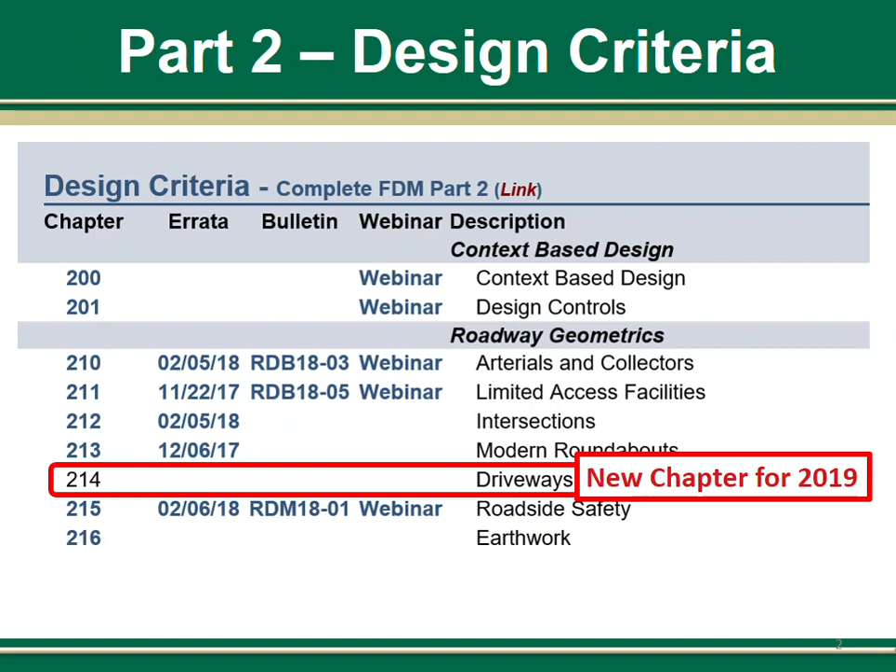As you may know, the FDM was a huge effort last year, and we didn't really have time to get to all of the chapters we wanted to develop for the FDM. And this was the case for chapter 214, but we were able to get it ready for the 2019 FDM. And we began by putting together a task team late last year. We ended up with a pretty diverse team from 4 different offices to develop and organize the new chapter. And our first meeting was at the end of January.

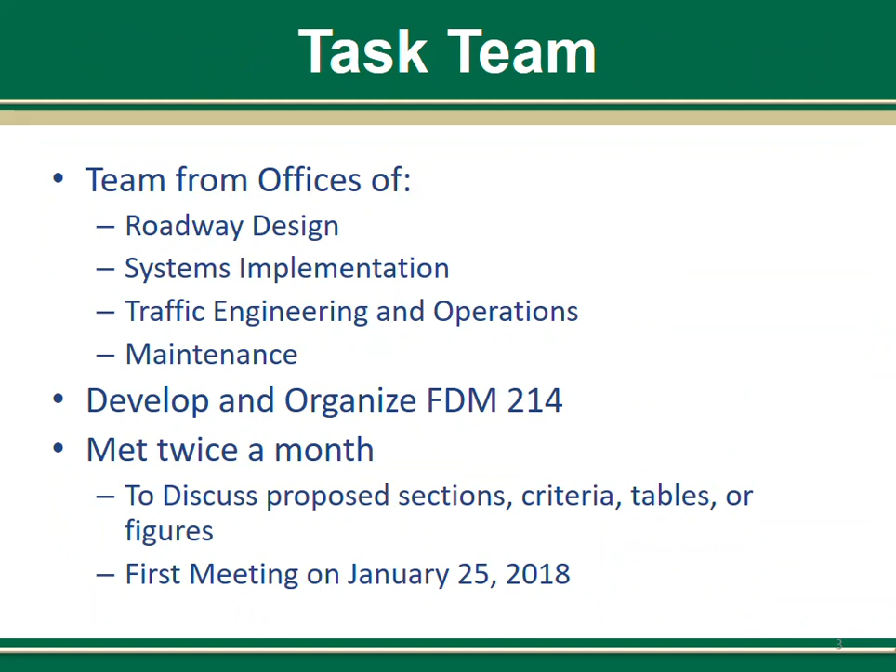Our team consisted of 8 original members. I was the lead on this task team, but there were two other members from the Roadway Design Office, including Mary Jane from Criteria and Durwood from Standard Plans. Gary and Gina represented the Systems Implementation Office, and Gary was one of the last authors of the FDOT Driveway Information Guide in Central Office. So we wanted to capture as much of his knowledge as we could before he retired in the spring.

We also had Alan from Traffic Engineering and Operations, Tim from Maintenance, and Jim, a consultant. Now Jim was kind of our historian with over 35 years of engineering experience with FDOT, and he worked in Central Office for many years and as a subcommittee member on the AASHTO Green Book.

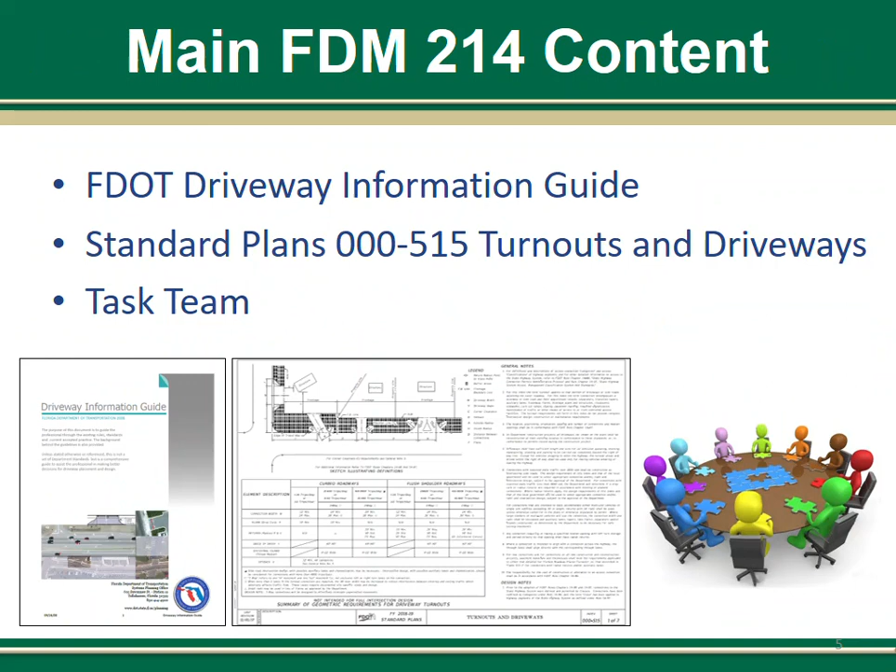We had 2 main sources for developing this chapter other than the task team, including the old Driveway Information Guide and the Standard Plans Index 515. We started with the Driveway Information Guide, which was about 94 pages in length, but you'll be happy to know that we ended up with a much smaller chapter for the FDM. It's about 24 pages long, and it took several meetings to decide what should be included in this chapter.

We considered 3 different options initially. One that was really an all-inclusive chapter that would cover everything you need to know for driveways from A to Z. And then the other extreme was to provide just criteria. We ended up somewhere in the middle, but closer to the criteria option, which provides mostly criteria with a little bit of guidance. And as part of our efforts to move design-related information from the standard plans to the FDM, the criteria and many of the figures and tables in this chapter came from the standard plans, the old Index 515.

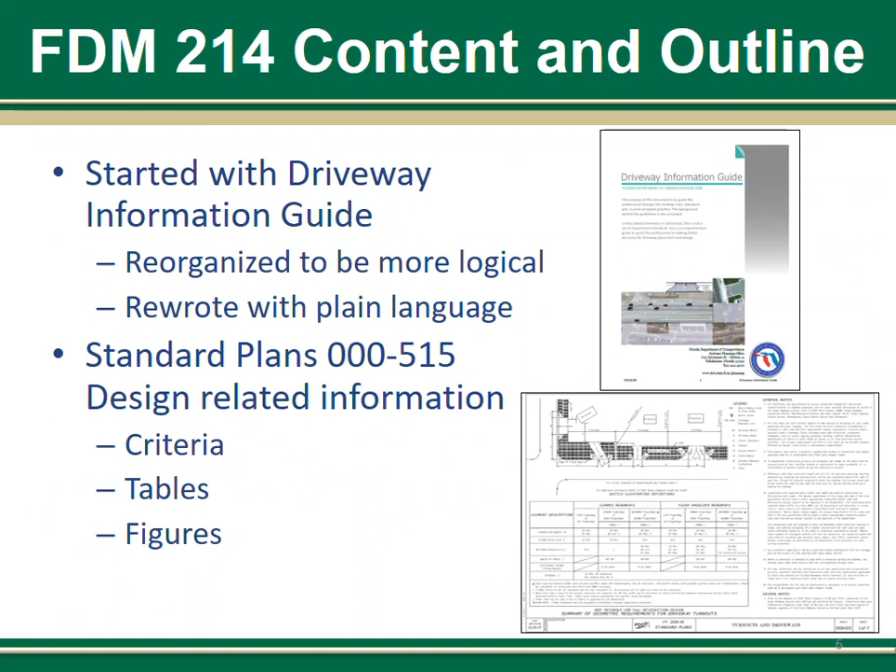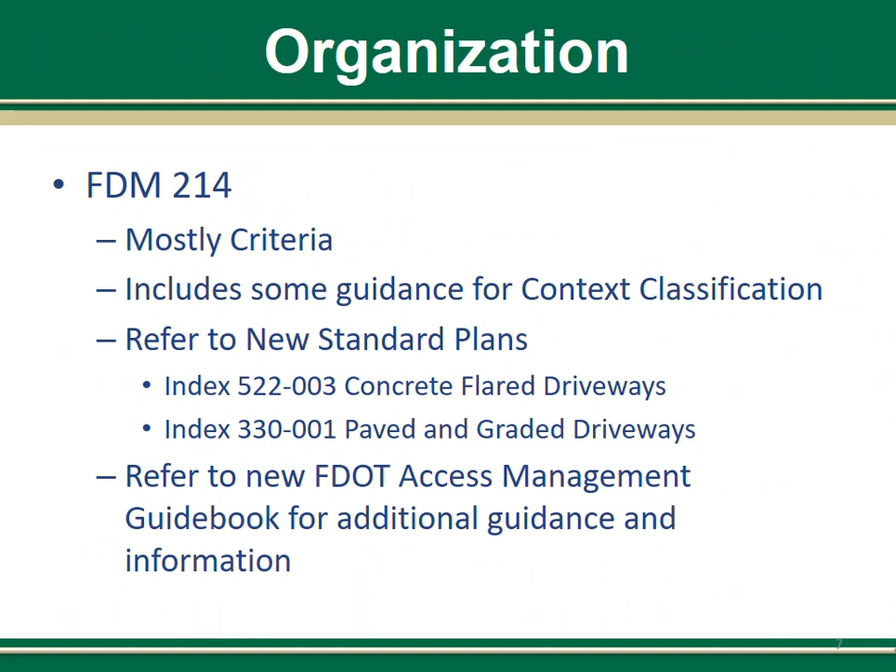So this chapter is mostly criteria with some guidance for context classifications, and it refers to the new standard plans and to the new FDOT Access Management Guidebook for additional guidance and information. Well, you might be wondering, what is this new FDOT Access Management Guidebook? Well, the new Access Management Guidebook combines and updates the old Driveway Information Guide and the Median Handbook. And this should be available in the near future, hopefully by the end of this year.

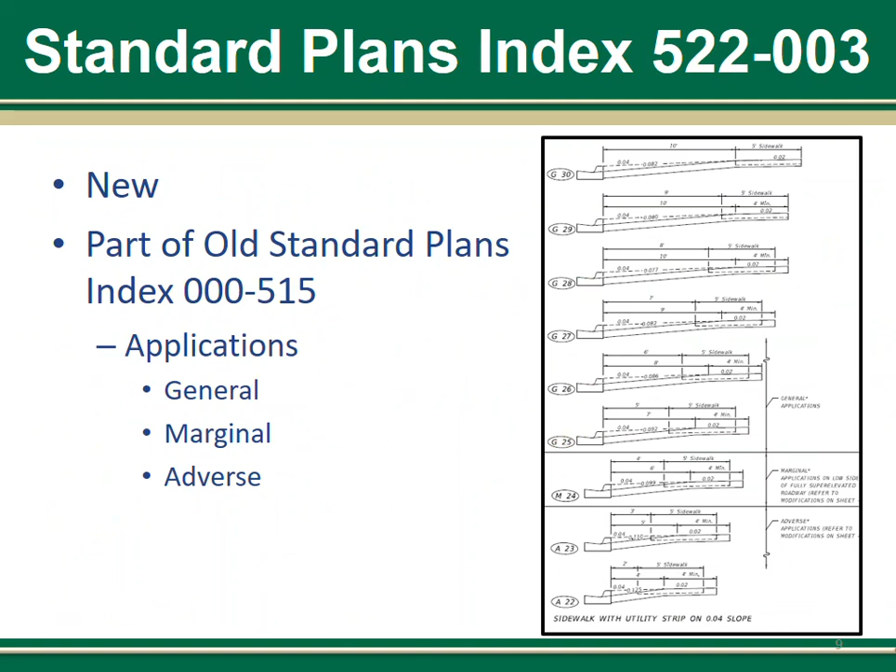The new Standard Plans Index 522-003 is part of the old Index 515, and it has the driveway application details from the old index, like the one shown here on the right of the screen. A description of each application from the general to adverse is now provided in the FDM in this new chapter.

So the chapter is divided up into 8 main sections. The first one, the general section, covers what is contained in the chapter, and it defines the term driveway and related terms such as connection and turnout. And it includes two subsections for driveway terminology and evaluation of existing driveways. The flared and radial return design section gives designers direction on when each driveway type is appropriate. Whether you want to have a flared driveway or a radial return, it talks about when to choose which one.

And then we have two sections for driveway geometry, one for horizontal and one for vertical. In the horizontal section, most of the criteria, tables and figures came from the first sheet of the old Index 515. It also has subsections for each of the driveway elements covered in the table on the first sheet of the old index, which I'll get into in more detail in a few minutes. And then we had the vertical geometry section, which takes the last sheet of the old index, sheet 7, and brings those figures, tables, and notes over into this new chapter.

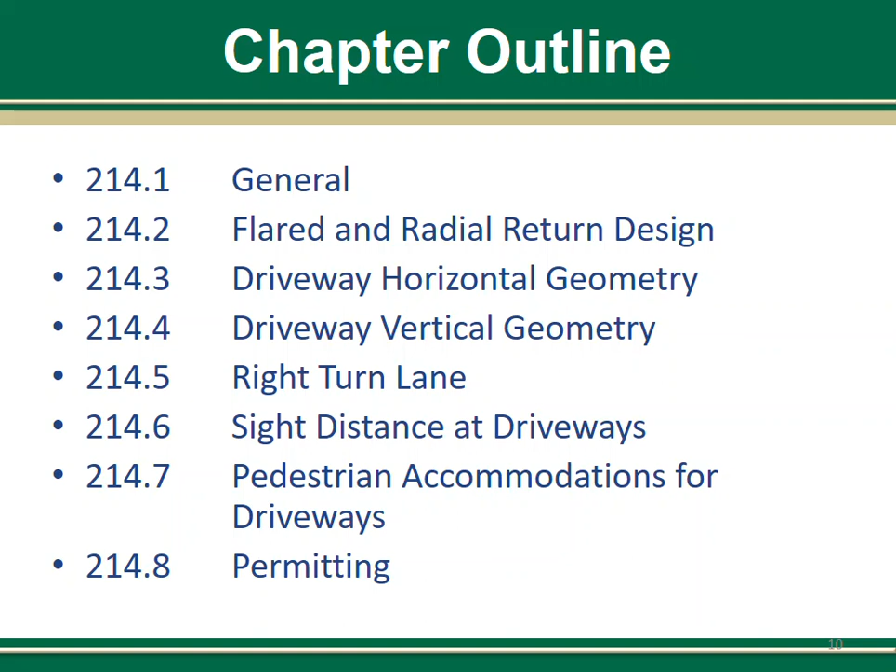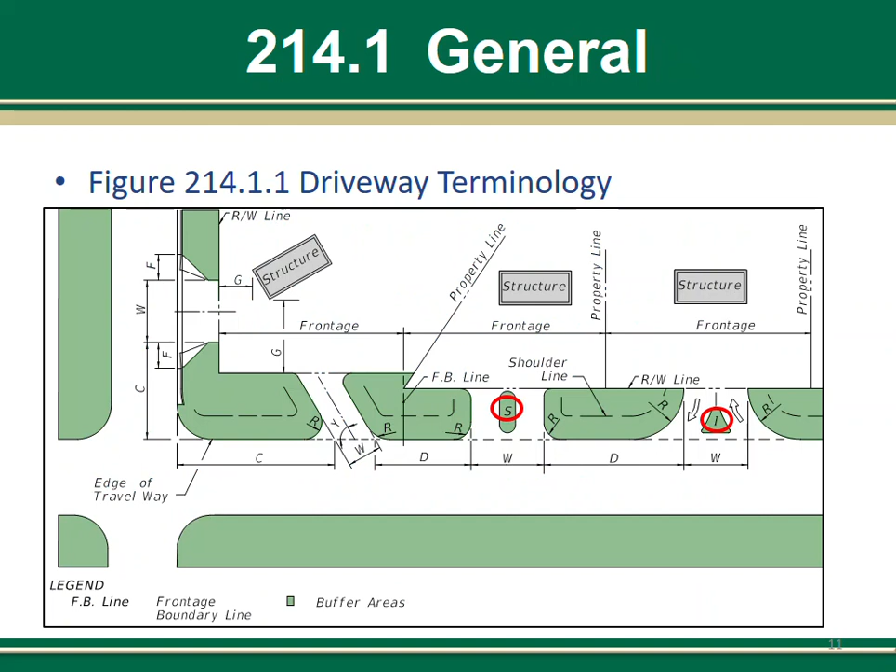Now this table was added here to help you determine when to use a flared driveway versus a radial return driveway. We broke it down into its simplest form, and the table consists of the elements of the roadway that you should be concerned about, whether it's a curbed roadway or a flush shoulder roadway. And then also you base your determination on the connection category.

So the connection categories, this is nothing new. It's from the old Florida Administrative Code, Rule 1496. Now, used to we had volumes. If you remember the old table from the index, it had volumes and the traffic volumes for each driveway, each connection. But these connection categories really include those types of volumes.

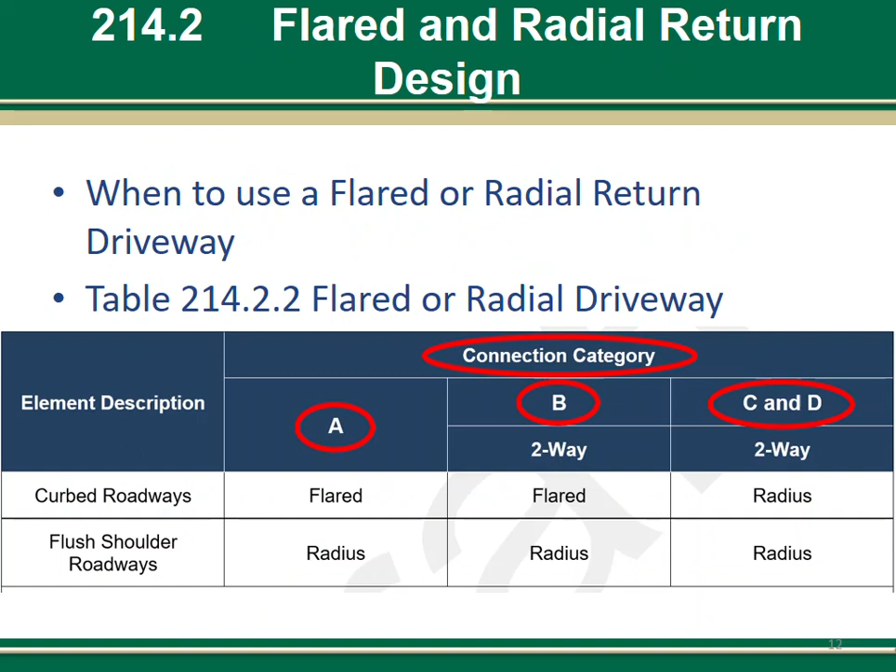So here is what is in the connection categories. This was from the old Florida Administrative Code. A through G are defined in that code. But for our purposes, for this chapter, we're only concerned about A through D. Anything above that, the higher volumes of driveways, would be considered not a driveway, but designed as an intersection, which are covered in FDM 212. But A through D, that's what we're concerned about with this chapter.

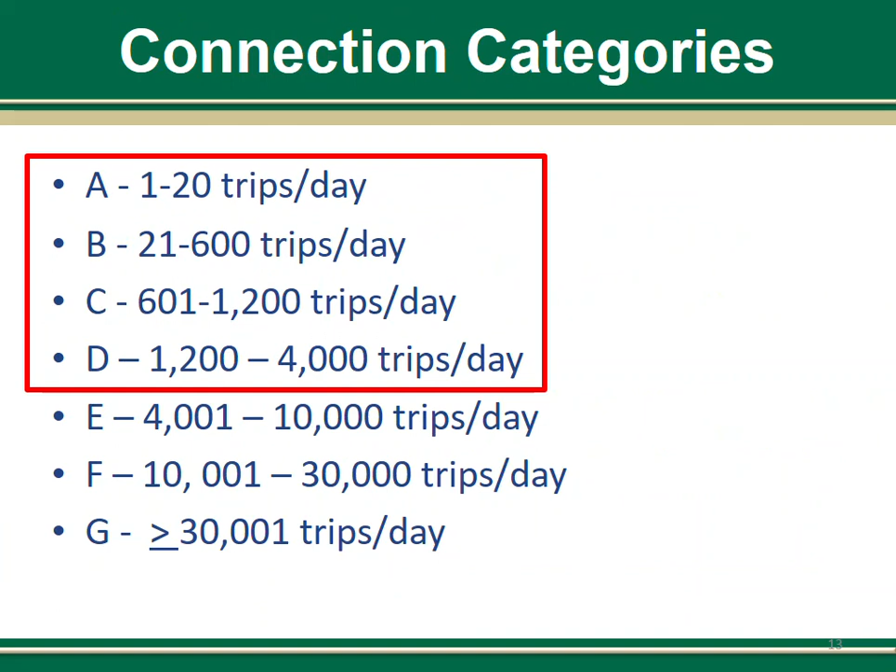This table is from the old 515 index, and it's been rearranged and updated to fit onto this page and be more consistent with the other FDM tables. But it's mostly the same as the old table that we had in the index. We did add a new row to the bottom there for corner clearance and driveway spacing with a reference to the tables in FDM 201.

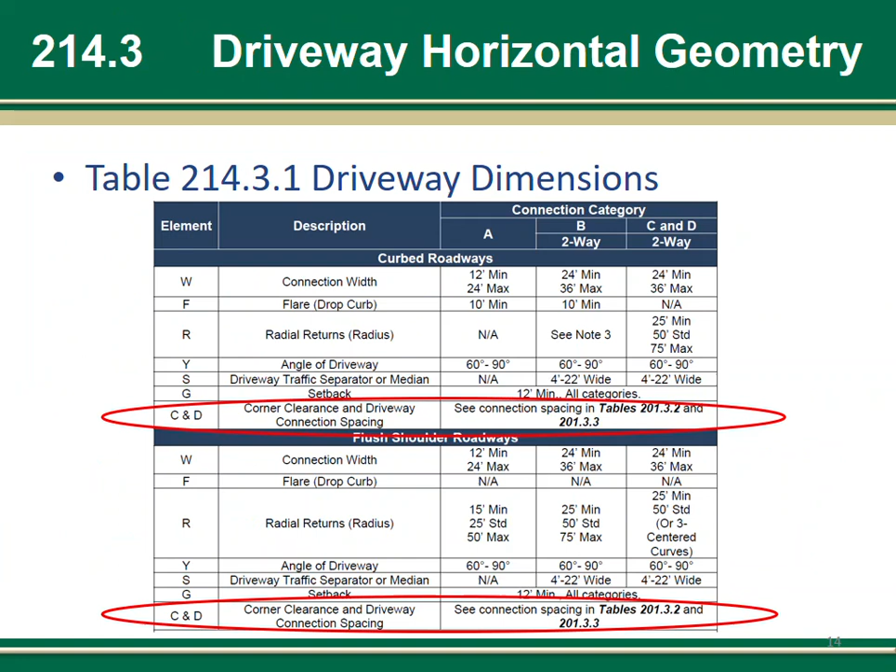We also replaced divisional islands and driveway with driveway traffic separators and medians, and replaced the slash with an NA for connection category A.

We replaced the diagonal line that was in the old table with a range of 60 to 90 degrees for angled driveways on connection category A. But this angle may be reduced if you need to, if you find it appropriate for your application, but it has to be approved by the local operations and maintenance office to do so.

And you might find the need to reduce this angle when you have a driveway that is for entry off of the roadway that can have a steeper, sharper angle there, less than 60 degrees. It's more of an issue when you're trying to get onto the main roadway, where you'd want to be closer to a 90-degree angle so that the driver can see down the road. It becomes more of a sight distance issue. But when they're getting off of the road, you can have a sharper angle there typically, and it's less of an issue. But we have a way to do that covered in Note 4.

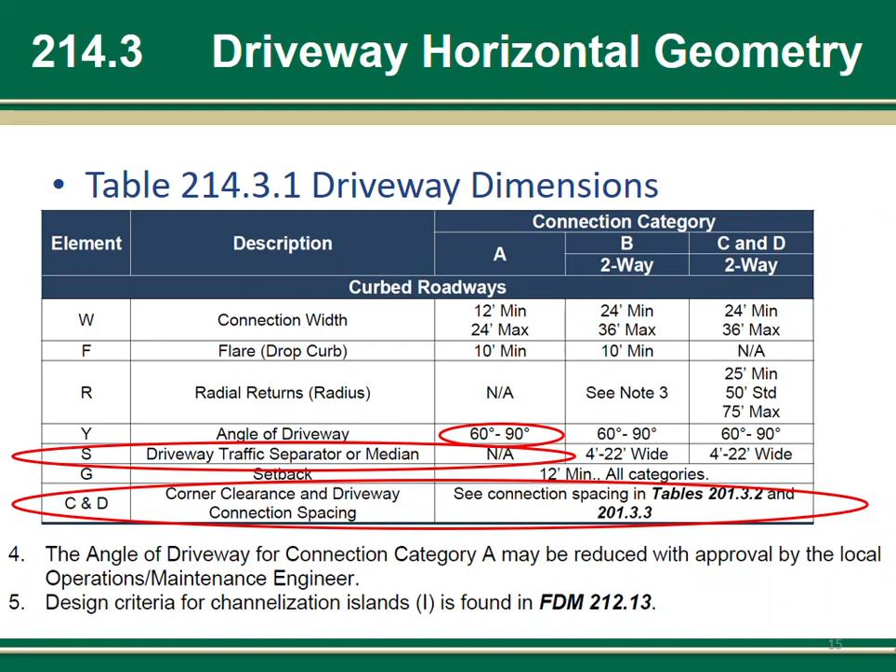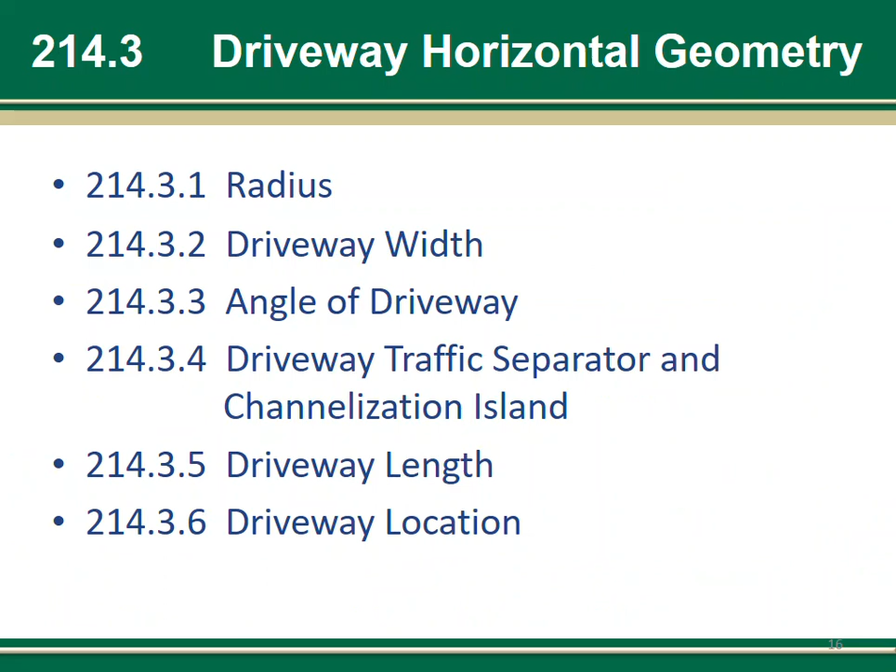So the driveway horizontal geometry section is broken up into six main sections, and these are all the elements that are from the table we discussed earlier. All these come from the elements in that table, from radius all the way down to driveway location. And these sections just go into further detail than the table did before.

Something new that we did add, we have two subsections for driveway location. The interchange areas, first one. Now this is not new. This is from the Florida Administrative Code 1497, and it was added. It's also been added to FDM Table 201.3.2, and it just wasn't provided in the old FDM, but it was referred to. You could go and find this information in the Florida Administrative Code, but we thought it would be easier just to bring it over so that the guidance, the criteria would be right here in this chapter, so you wouldn't have to go and look for it.

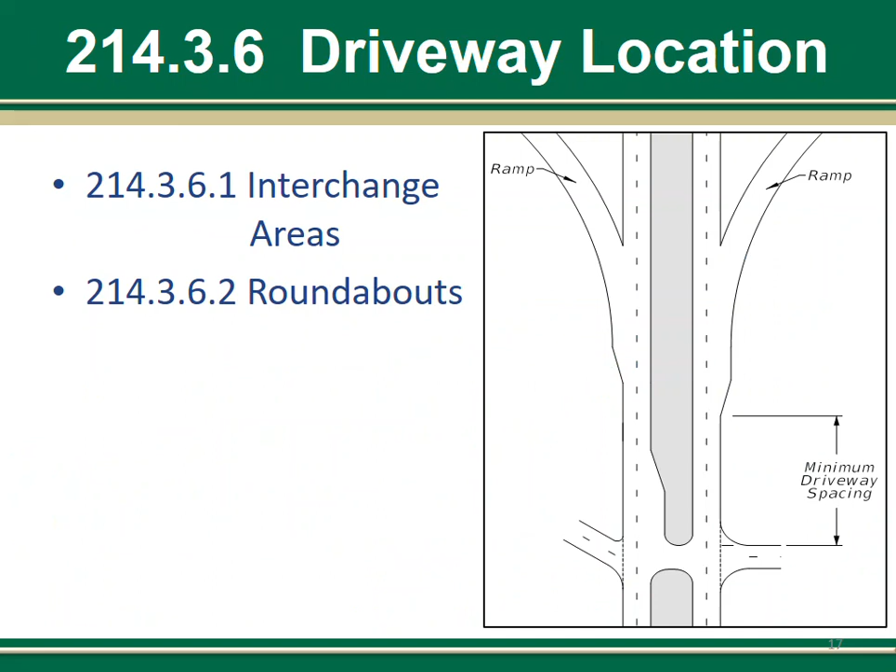And then the roundabout section, this is brand new to the manual, and it really was, we thought we needed to add something here for roundabouts, for driveways at roundabouts, because we're putting a lot more roundabouts on our roadways now. And this gives you some guidance and direction on how to do that.

For the driveway vertical geometry section, it's broken down into two main subsections: the driveway profile on curbed roadways, and driveway profiles on flush shoulder roadways. We'll go through these tables real quick, but most of them should look familiar to you.

Most of the figures and tables are brought over from the old index. We did add a little bit to help explain some of the things that have been brought over and have been around for a while, but we thought it would be useful, especially for newer designers.

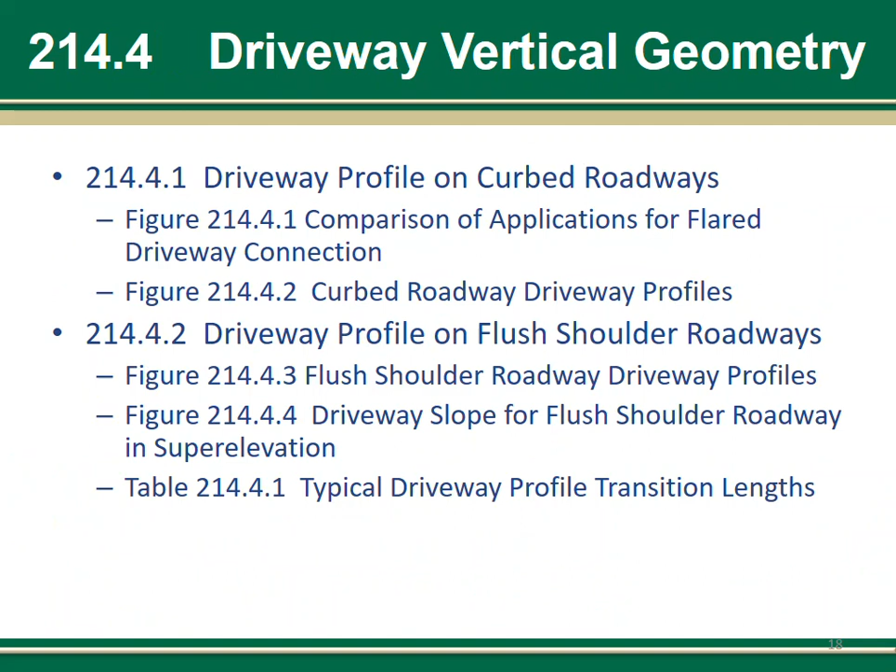So this figure is brand new. We came up with a figure that would just compare the different applications for flared driveways.

We still have the old details. All the details for these applications are provided in the standard plans, index 522003, about 2 pages worth of different figures and details, but we wanted to show you a comparison here.

So that you would quickly say, okay, I have plenty of right-of-way, so I can use a general driveway here. Or maybe I don't have as much room, so maybe I'll use a marginal or adverse driveway. The figure just shows you how they're different, how they vary a little bit, and you can pick out the one that's most appropriate from the index.

In this section, we also talk about what things to consider, what may happen, how it could affect some of your design vehicles using these different types of driveways, and how they vary. So there's a little bit more guidance here, to make it a little easier for younger designers to choose which driveway to use.

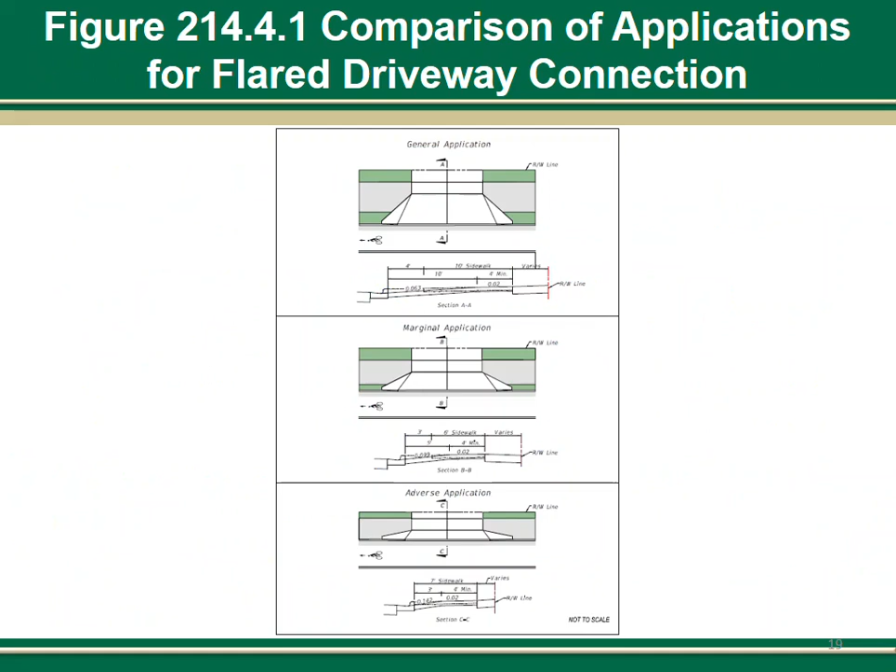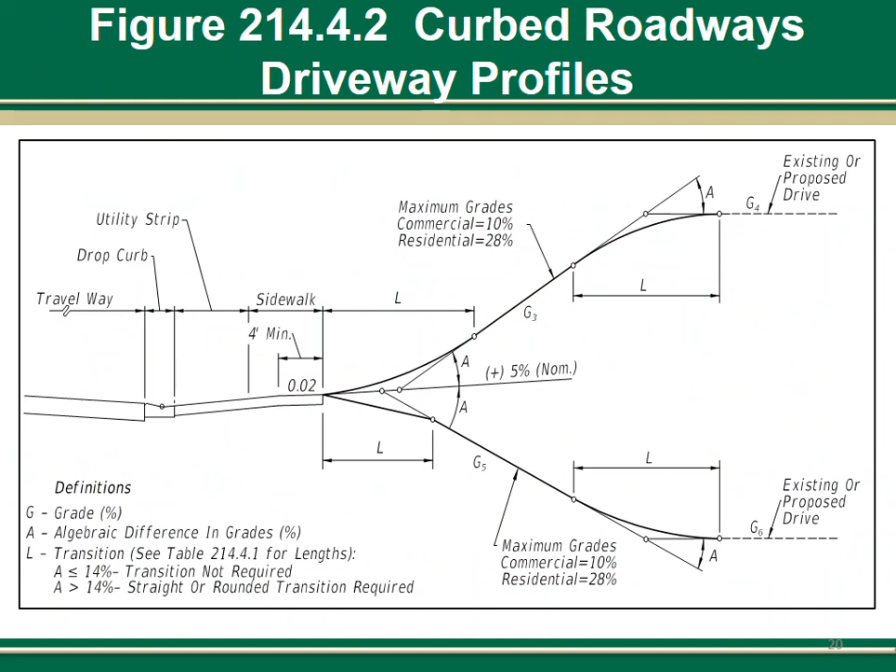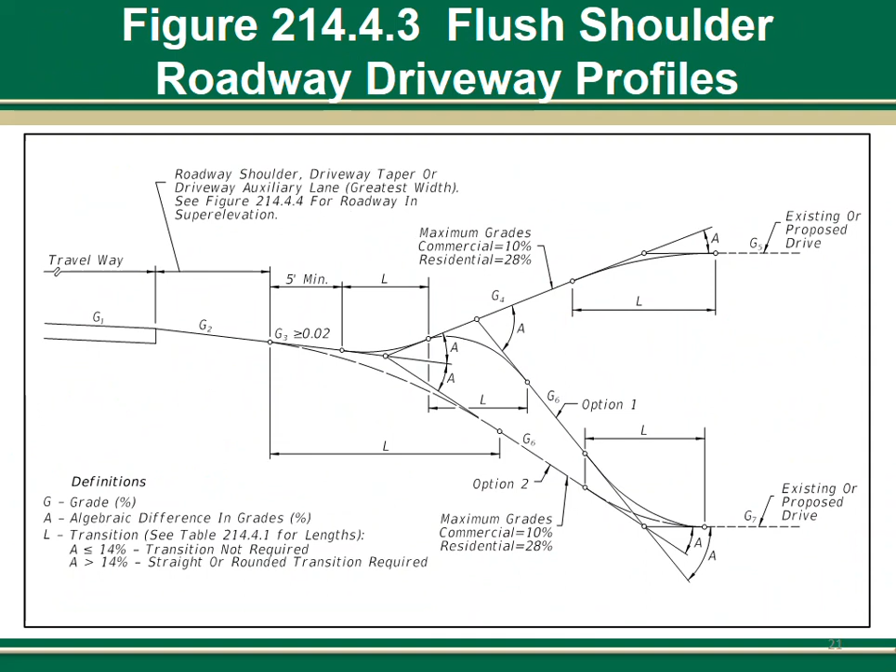This table also is pretty much the same. The flush shoulder roadway design driveway profile, we didn't change it. It's really the same. It refers to the table now that's been moved over to the FDM, but the criteria here is all the same.

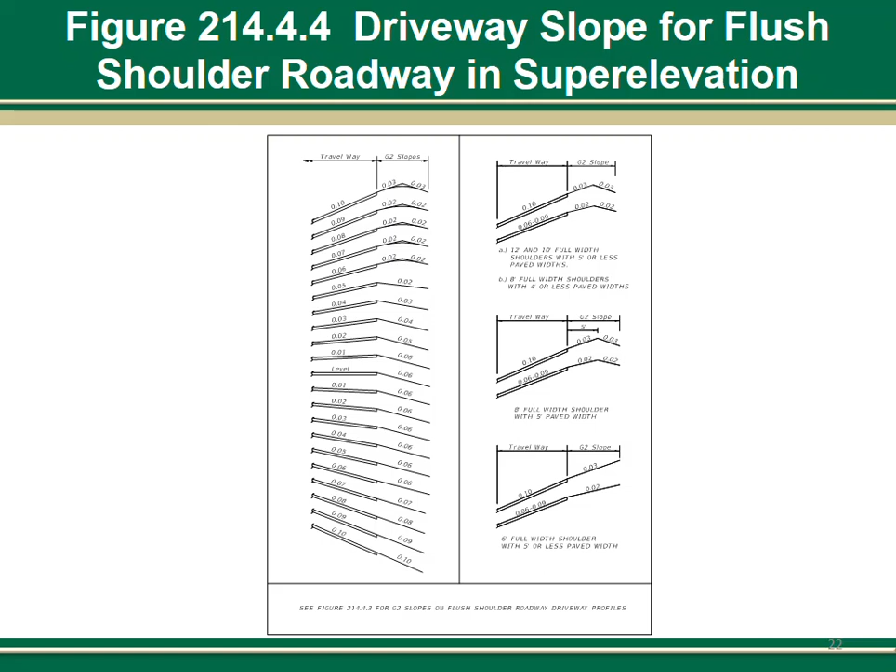This figure we didn't change anything here. We just cleaned it up for the FDM, but all these values are the same as they were in the old index.

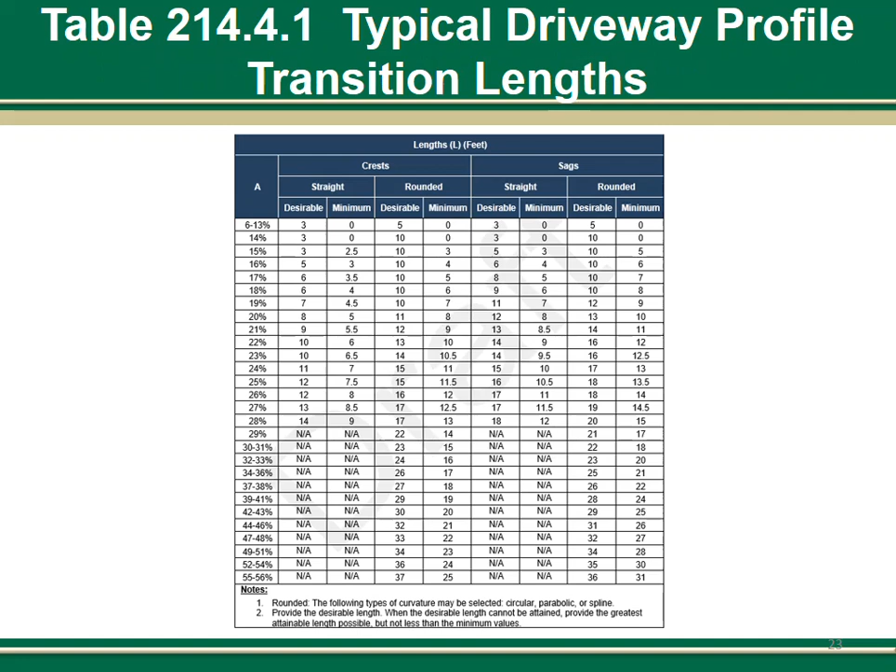So the last 4 main sections, most of these are just references to other parts of the FDM, other criteria that's already been around for a while. Nothing really new here.

The sight distance at driveways is something new I want to tell you about in just a second. But the permitting chapter I've already told you about. It talks a little bit about when you need permitting on your roadway, and then it links you to the one-stop permitting website.

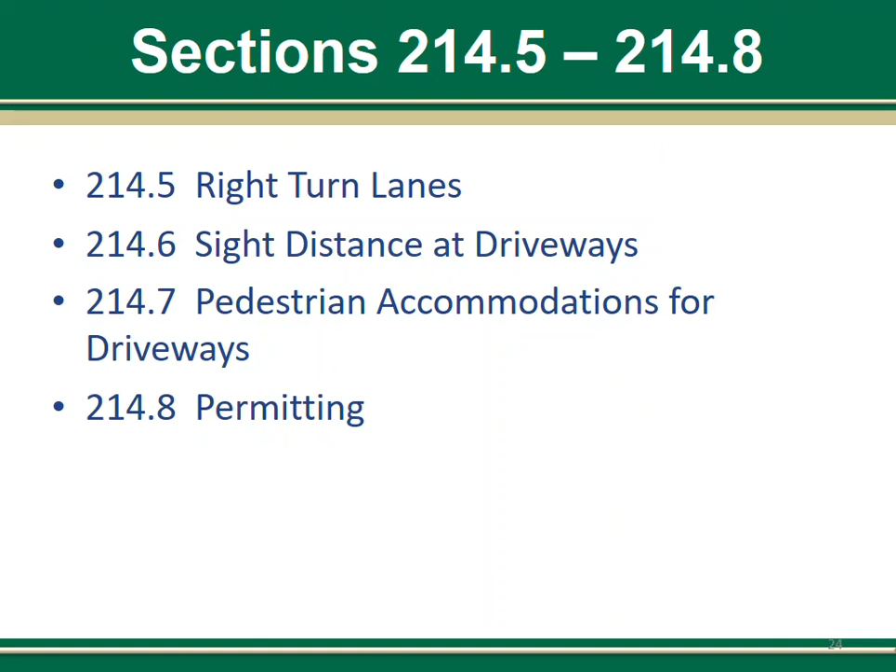So this is something new for driveways, and you'll probably be pleased to hear about this. Before, we used to require intersection sight distance for driveways. Now, when intersection sight distance cannot be met for very low speed roadways, meaning design speeds equal to or less than 35 miles per hour, you can provide the greatest sight distance possible - as close to intersection sight distance as you can, but not less than the minimum stopping sight distance values covered in FDM 210.

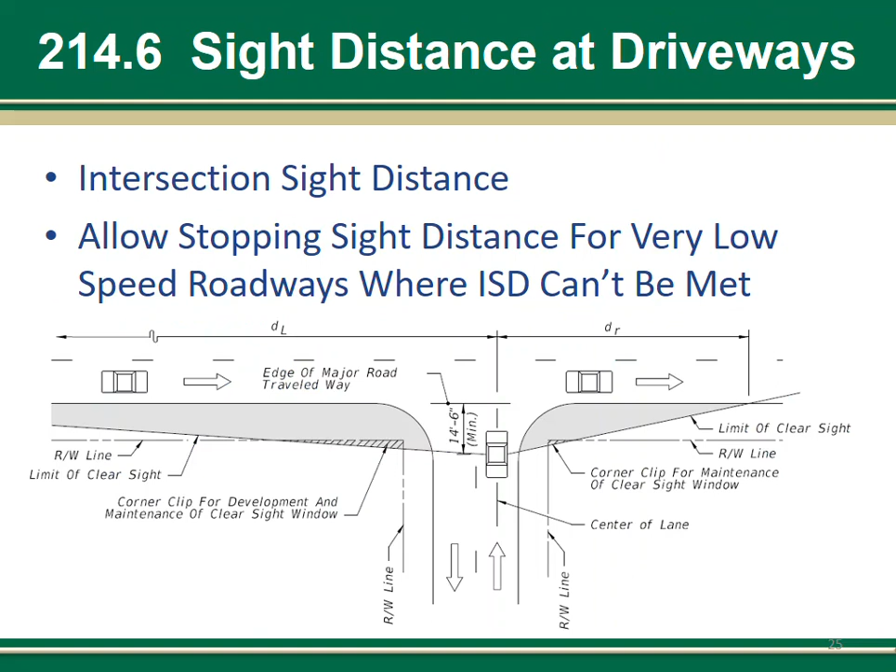So to sum it up, this chapter consists mostly of criteria. It includes some guidance for context classification, and it refers to the new Access Management Guidebook and also the new standard plans.